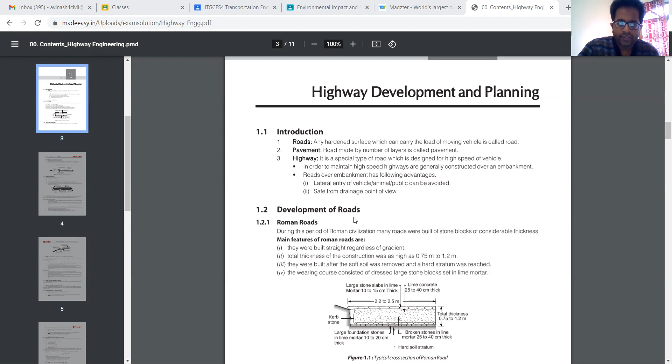Now let us come to the development of roads. The first type of road is the Roman road. Roman road means roads constructed during the very early time of Roman civilization, when there was road construction.

These roads were made up of stone blocks. The road construction was carried out with the help of stone blocks of considerable thickness.

There are certain features of Roman roads. The Roman roads were straight roads, and there was no consideration given to the gradient of the slope of the road.

Now consider the total thickness of construction. As you can see in this figure, the total thickness of construction is 0.75 to 1.2 meter.

This is how the road construction was done. First, we need to remove the soft soil. Once the soft soil is removed from the top, a hard stratum will be reached, and the road construction will be carried out on this hard stratum.

On the top, you can see there is one wearing course. The topmost layer is called the wearing course, and it is made up of large stone slabs set in lime mortar, having a thickness of 10 to 15 centimeter.

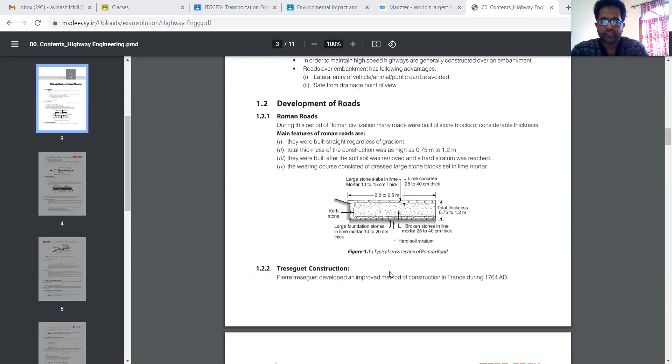The next one is Tresaguet construction. Tresaguet construction means it is another type of construction.

The thickness of the road - here you can observe the figure - will be of the order of 30 centimeter. The road will be having a thickness of about 30 centimeter.

In the case of Tresaguet construction, the subgrade moisture condition and drainage of surface water need to be considered.

The top wearing course was made up of smaller slope. In the top, you will be having a wearing course made up of small slope having a cross slope of 1 in 45.

Then a shoulder sloping is provided, with the slope value ranging from 1 in 20. This is about the Tresaguet construction.

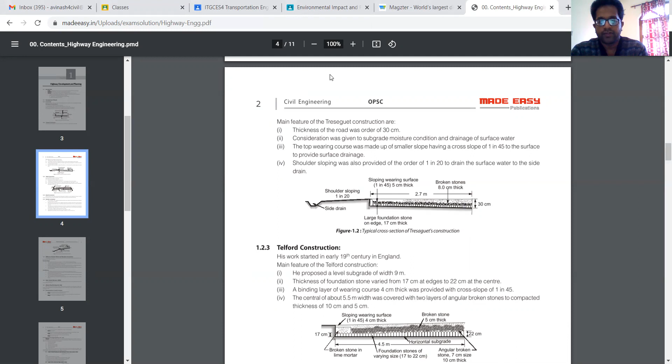The next one is Telford construction. The main feature of Telford construction is he proposed a level subgrade of width 9 meter, which was considered for the subgrade.

Over this subgrade layer, the thickness of foundation stone varied from 17 cm at edges to 22 cm at the center. You will be having a course of foundation stones starting at 17 centimeter at the edges, and the thickness goes on increasing as you move forward from the edges towards the center, reaching a value of 22 centimeter at the center.

Then a 4 centimeter thick binding layer is provided with a cross slope of 1 in 45. This is about the basic features of Telford Construction.

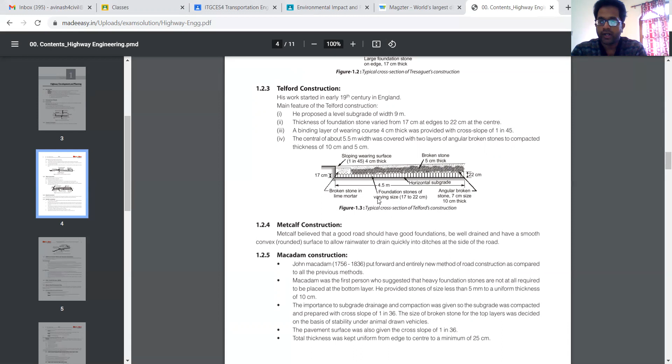The next one is Metcalf Construction. Metcalf Construction is a bit more advanced when we consider the already discussed construction methods.

In case of Metcalf Construction, there was one more important aspect considered, that the road should have a very good foundation. It should be well drained and it should have a smooth surface so that rainwater will be allowed to drain quickly.

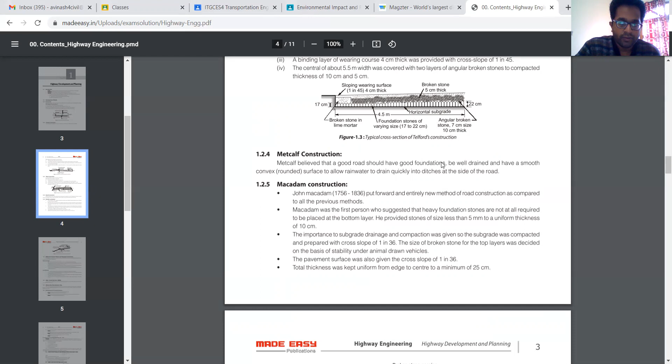So that the rainwater will be allowed to drain quickly. Now let us see the different features of Macadam Construction.

Next one is Macadam Construction. Macadam is the name of a scientist who proposed that there is no need of heavy foundation stones at the bottom layer of the road network. So he started to provide broken stones passing 5 centimeter size, to a uniform thickness of 10 centimeter.

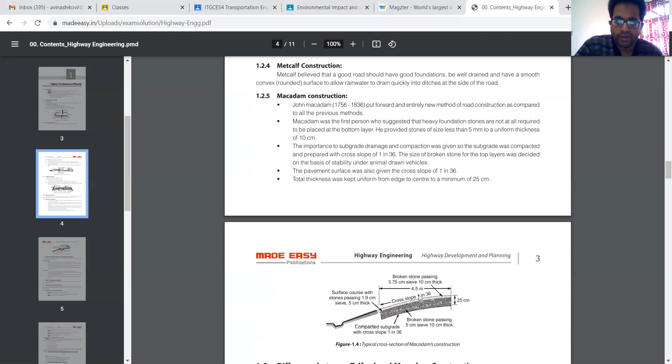In Macadam Construction, large importance was given to subgrade drainage. Proper compaction was given so that the subgrade is compacted and having a cross slope of 1 in 36. The total pavement surface is also given a cross slope of 1 in 36. So that is about the Macadam Construction.

Now we can have a comparative study between Telford and Macadam Construction. In Macadam method, we have already seen a cross slope of 1 in 36, the objective being to make sure the draining is proper, to have a proper subgrade drainage. At the bottom layer of pavement or sub-base course, it consisted of broken stones less than 5 centimeter size, to a uniform thickness of 10 centimeter.

The base and surface courses will be consisting of broken stones, compacted to a thickness of 10 and 5 centimeter respectively. Starting from edge to center, the total thickness of pavement construction should have a minimum value of only 25 centimeters. So these are the different features of Macadam method.

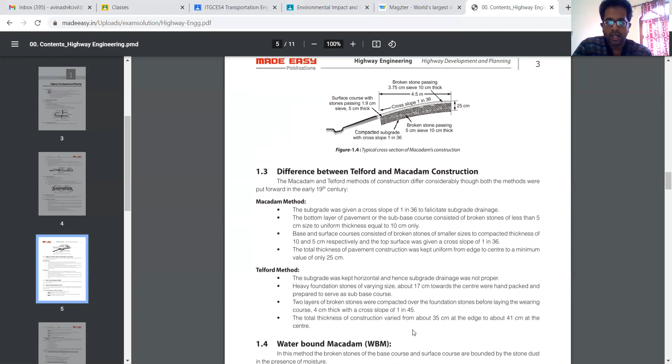When you consider the total thickness of construction, it will be varying from 35 centimeter at the edges to about 41 centimeter at the center. So that is about the history of roads. Are you getting it? Okay, so now let us get into the other details.

Modern roads developed in India. Whatever road development we see in our country today is in response to a resolution passed in the year 1927. This is known as Jayakar Committee recommendation. A committee was constituted in 1927 with Jayakar, the name of a person who was heading that committee. So the recommendations put forward by that committee is known as Jayakar Committee recommendation.

Jayakar Committee gave some recommendations regarding road development. First of all, the road development should be considered as a national interest. That was the first recommendation given by the Jayakar Committee.

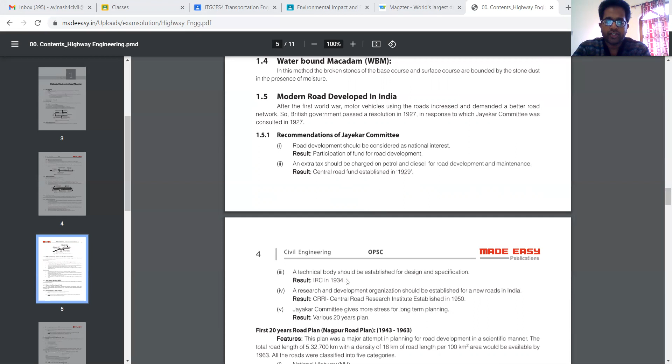Another recommendation made by the Jayakar Committee was for the design and specification of roads—a technical body should be established. This recommendation was made in 1927, and in response, in 1934, the Indian Road Congress, IRC, was formed as a response to the Jayakar Committee recommendation of establishing a technical body for design and specification.

Next, for research related to roads: if new roads need to be established, in order to carry out research related to these roads, a specific organization for research and development needed to be established. That was the fourth recommendation made by Jayakar.

As a result of this recommendation, in the year 1950—so whatever we are mentioning here is in chronological order. In 1927, the Jayakar Committee was constituted for giving recommendations for road development. As per its recommendations, in 1929 the Central Road Fund was established. In 1934, IRC was established, and a research and development organization was constituted in 1950, known as CRRI, the Central Road Research Institute.

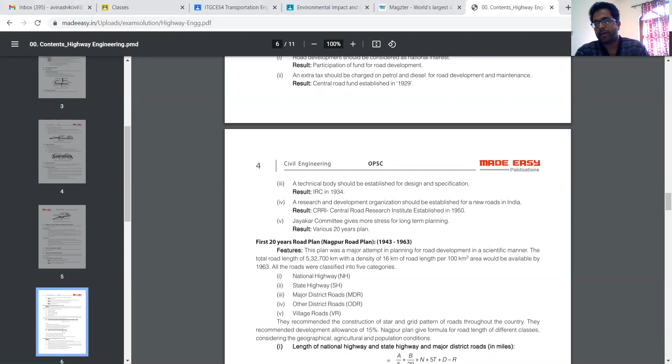This 20-year road development plan is similar to our 5-year plan. You know about the Planning Commission of India, now known as the NITI Aayog—every 5 years, certain specific objectives are made for that time period and met by NITI Aayog. Similarly, in the history of road development in India, this 20-year road plan is very important.

We are going to see the different 20-year road development plans. The first 20-year road plan started in 1943 and was proposed for the period 1943 to 1963. This first plan is also known as the Nagpur Road Plan. This Nagpur Road Plan was a major attempt at planning road development in a scientific manner.

When the project was started in 1943, the objective was that by the year 1963, there would be 16 kilometers of road length per 100 square kilometers of area. This was the objective of the first 20-year road development plan, also known as the Nagpur plan.

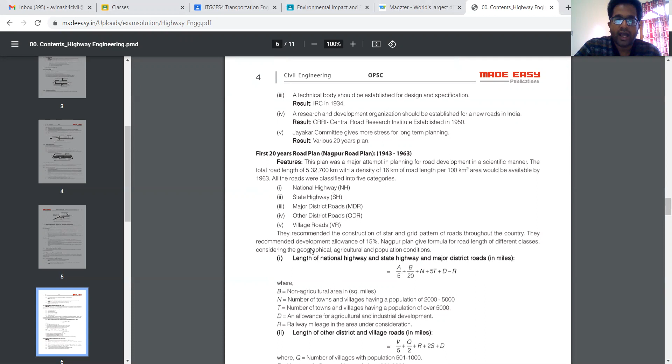According to the Nagpur plan, roads were classified into 5 categories: national highway, state highway, major district road, other district road, and village road. These are the 5 classifications of roads as per the Nagpur road plan.

Now, some formula is given for how to calculate the road length, but that is not required as of now. We'll study all those things later.

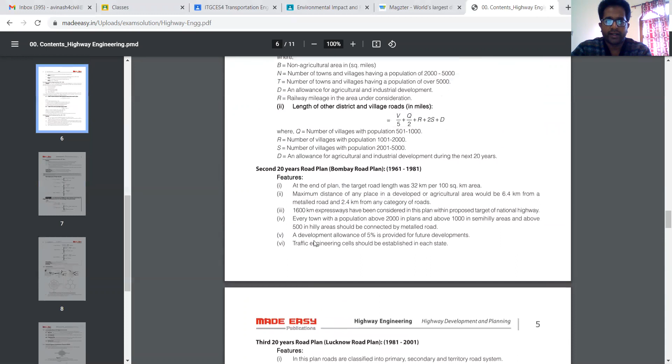Next is the second 20-year road development plan. The Nagpur plan was proposed from 1943 to 1963, but the objective was met by the year 1961 itself, within a period of 18 years. The objective was that for an area of 100 square kilometers, there should be a road length of 16 kilometers. So from 1961 to 1981, the second 20-year road plan was formed.

That is known as the Bombay Road Plan. According to the Bombay Road Plan, for 100 square kilometer area, the target road length will be 32 kilometers per 100 square kilometer area.

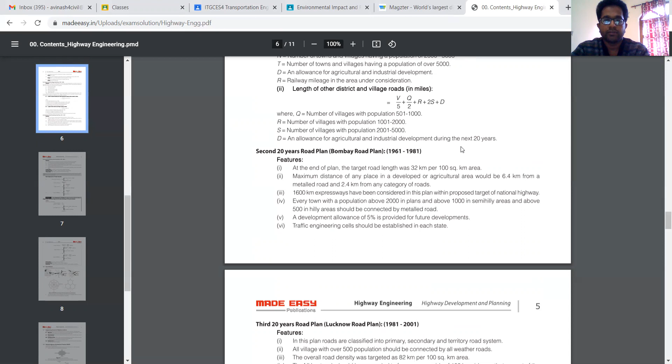Next is the third 20-year road development plan. The second plan ran from 1961 to 1981, and the third from 1981 to 2001. In this third plan, the main feature was that roads would be classified into three road systems: primary, secondary, and tertiary road systems.

If there is a village with a population over 500, it should be connected by all-weather roads. And the road density target was that for every 100 square kilometer area, there should be a road length of 82 kilometers. So that is about the third 20-year road development plan.

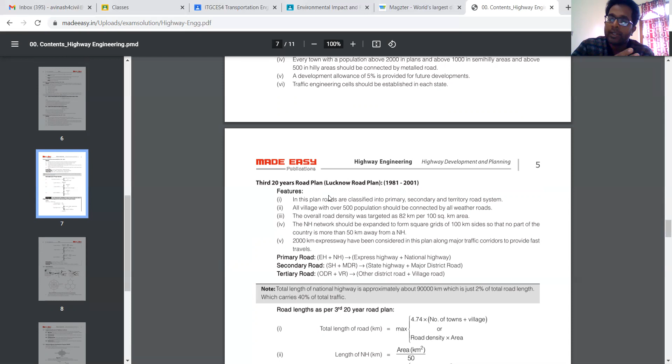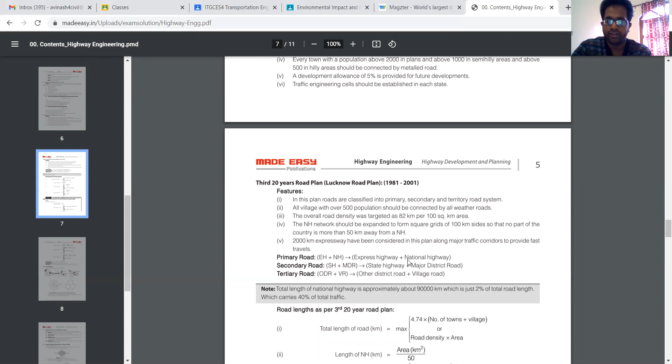So that covers the different road development plans. In the third 20-year road development plan, road networks were classified into primary, secondary and tertiary systems. The primary system includes express highways and national highways. State highways and major district roads are included in secondary. Other district roads and village roads are included in tertiary. This is how the road network system was classified.

So that is the history of road development. You should understand what is meant by transportation engineering, and the different branches of transportation engineering, of which our focus is only on highway engineering in this subject. Now, how did highway engineering evolve?

In earlier, olden days, how were roads constructed? We have seen Roman roads, Tresaguet Construction, Telford Construction, Metcalf Construction, all these things. Then coming into the Indian context, how road development came into its present form in India.

The foremost thing is the Jayakar Committee recommendation. You should remember the years for all these events. 1927 was the Jayakar Committee recommendation, and as part of it, the Central Road Fund was developed in 1929. Then the Indian Road Congress was developed in 1934, and the Central Road Research Institute was constituted in 1950. Remember the events as well as the years associated with them.

Then we have seen the different 20-year road development plans as a response to the Jayakar Committee recommendation. The first 20-year road development plan is also known as the Nagpur plan, the second as the Bombay plan, and the third 20-year road development plan is known as the Lucknow plan. We have also seen the features of all these plans.